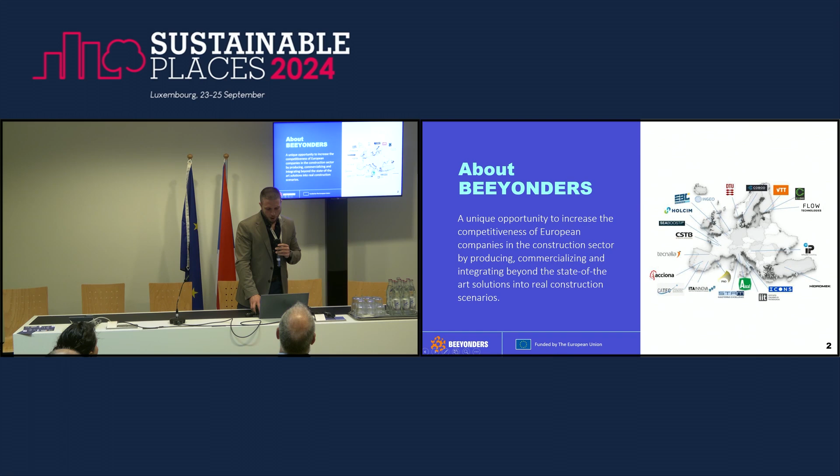This brings an opportunity for the construction sector to become more sustainable and competitive, taking advantage of state-of-the-art solutions that we are bringing from TRL4 to TRL6, as we just presented. If you're interested in learning more about the consortium, I'll be pleased to share more details on who is who and who is doing what.

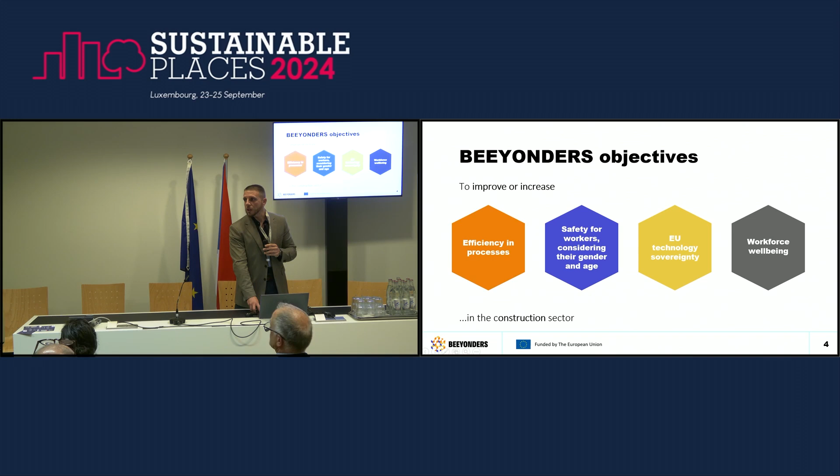Focusing on the project, the objectives we entail cover aspects like efficiency, safety, well-being, but especially the sovereignty of EU technology in the construction sector. It's also important to mention that we are engaging in cooperation with Japan so we can learn from their progress in digitalization of the construction sector. This is ongoing, and one of the use cases of the project is actively contributing to this cooperation, which is challenging yet very much of interest for us.

The 6 technologies being further developed within BEEYONDERS, deployed across our different study cases, are autonomous teleoperated ground and aerial vehicles, additive manufacturing, wearables and devices, exoskeletons, digital twins—one of the main elements we're speaking about today—and human-robot collaboration. I'll briefly introduce the different study cases of BEEYONDERS.

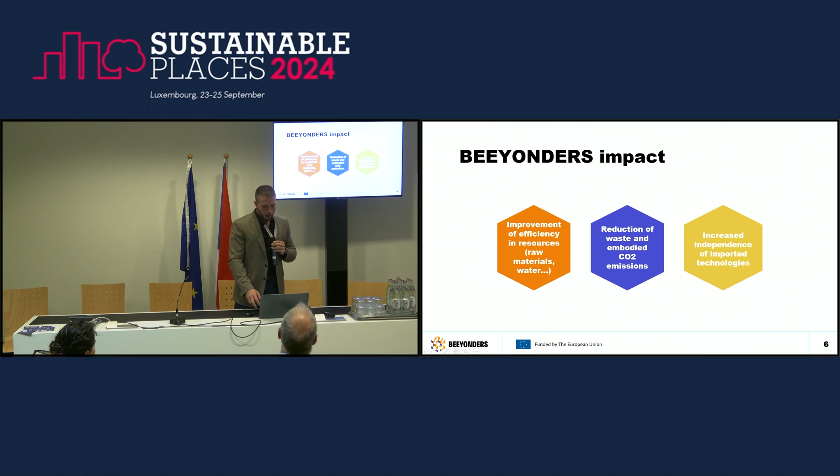These solutions are distributed across 6 real-life scenarios in order to test them. The impacts we expect to achieve are improving efficiency in resources, reducing waste and CO2 emissions, and increasing independence from imported technologies. These are a few indicators of what we are looking for.

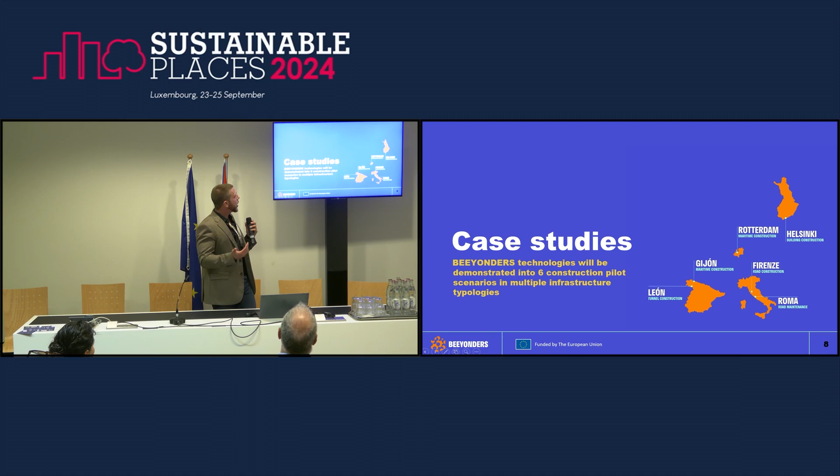Something that may be relevant for you is to acknowledge what are the pilot sites, the case studies that we have across Europe, and how technologies are distributed across all of them.

The first of our case studies takes place in León, Spain, where we are testing autonomous teleoperated vehicles in order to understand how we can maximize productivity in construction sites while not affecting construction safety and working conditions. We are also working with autonomous vehicles and digital twins for road construction in Italy.

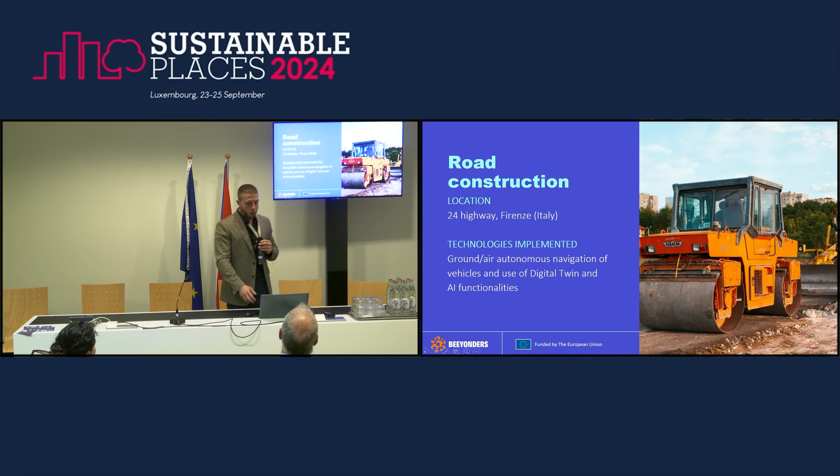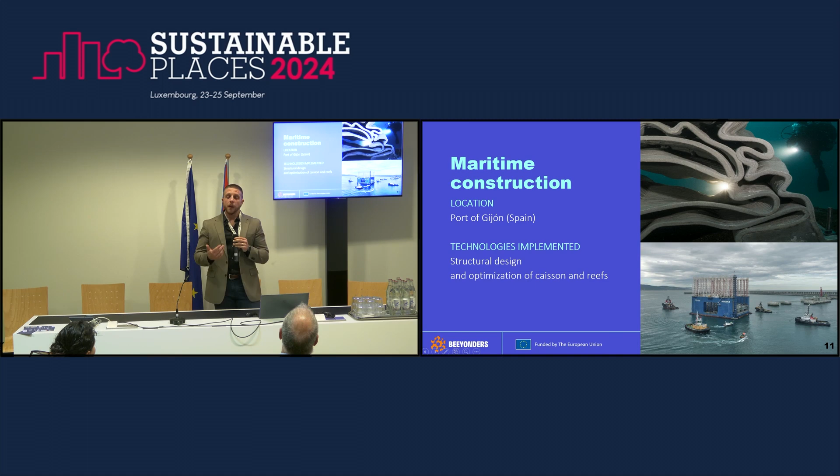We have a very interesting large-scale case in maritime construction where we are exploring novel ways to optimize the additive manufacturing of caissons and reefs that at the same time contribute to biodiversity in these maritime environments.

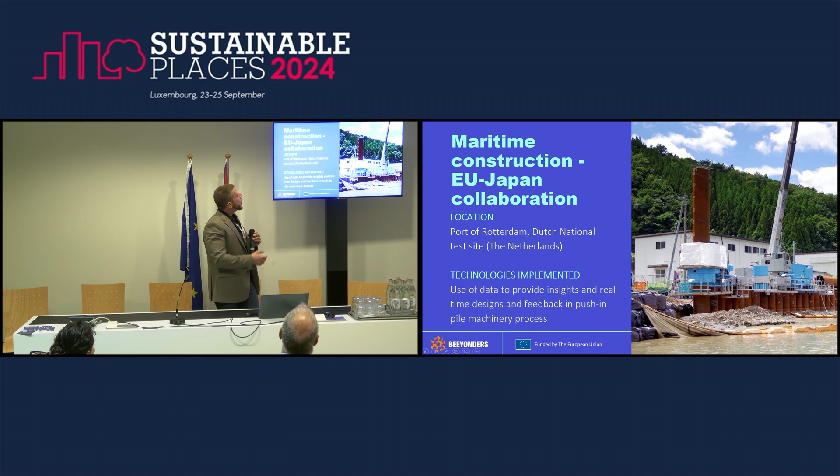As mentioned before, our case in the Port of Rotterdam embraces the collaboration with Japan in order to explore the efficiency of pile machinery processes.

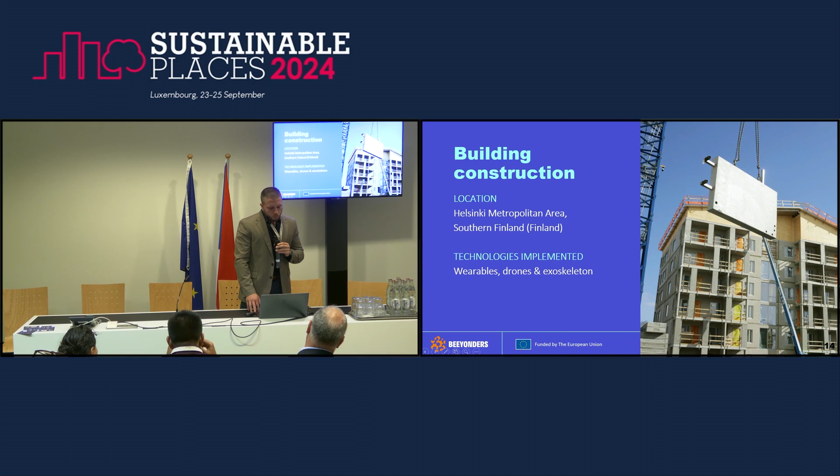The fourth one will work on autonomous robotics for road maintenance, and the sixth one will support the workers' well-being in the built environment.

The main reason for my personal interest being here today was to present where we are—around the second half, right in the middle of the second half of the project. So for me, leading exploitation activities, it was very interesting to present what we are doing as part of those activities, because we have one particular challenge.

This is a single entry point for the digital construction ecosystem, and I'm presenting what we envision as this single window for digitalization of the construction system, inviting all of you to provide your ideas and participate in a discussion for creating such an environment. In any case, this is a comprehensive pathway.

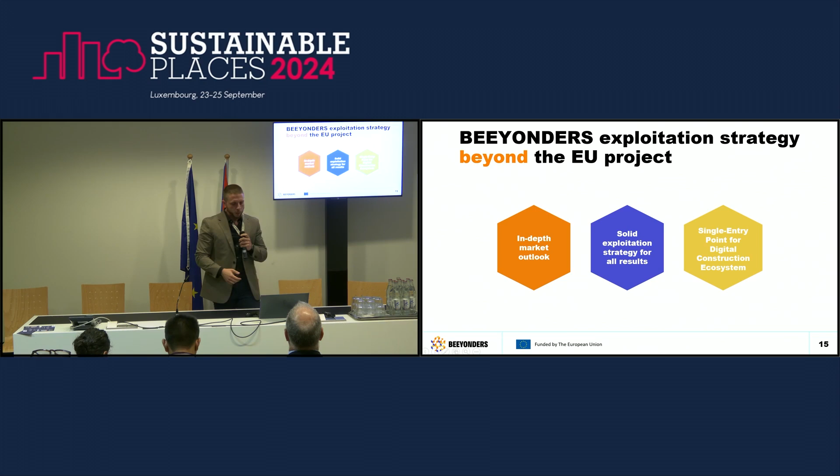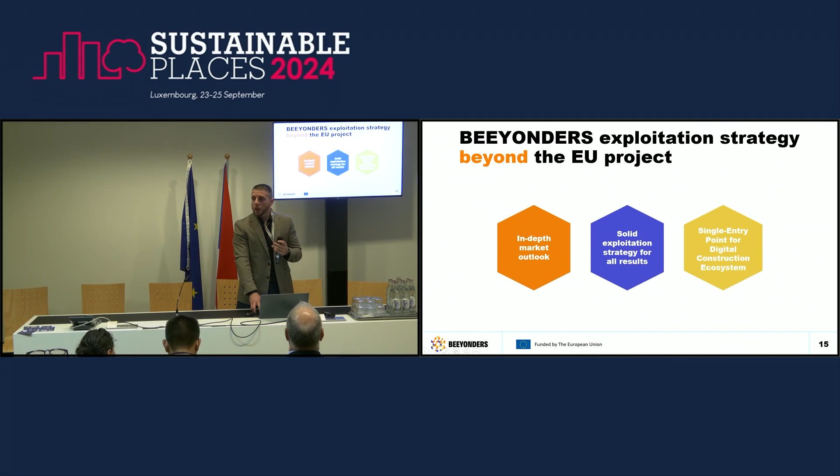We develop a market analysis and are developing conventional exploitation strategies for the results, but this single entry point for digital construction is something we cannot develop on our own as a project. So we are bringing this idea here today in order to collaborate, work together, and join forces to develop something like this.

Of course, we want to avoid creating a standalone environment, but as a project we have the commitment to define and imagine how this single window for digital construction will look like. This single window would become a hub for all actors in the value chain of the construction ecosystem, acknowledging the possibilities, the different services available, and the different elements that can help them be digital and sustainable, ultimately contributing to the overall sustainability of the construction sector.

That includes all the elements being developed within the BEEYONDERS project, but also results from sister projects and other related projects. I'm including some of the elements we are considering right now. We imagine this single entry point for digital construction as a catalog of products, services, and different elements that contribute to the digitalization of the construction sector, not restricted to BEEYONDERS, but open to other projects interested in contributing to this initiative and collaborative environment.

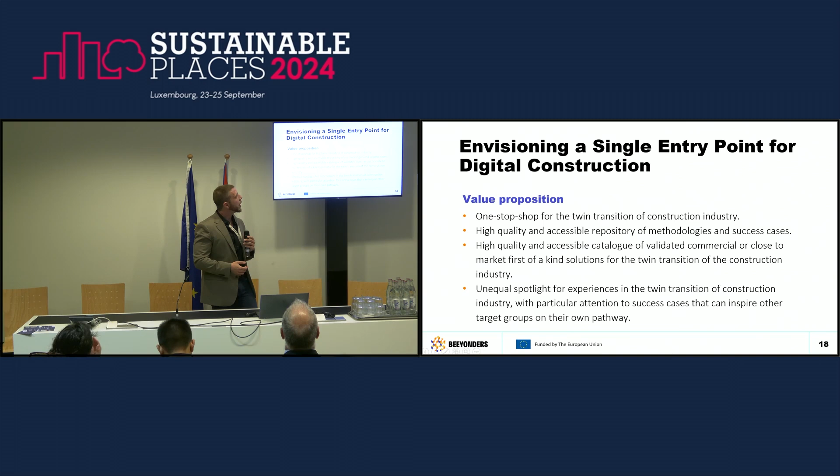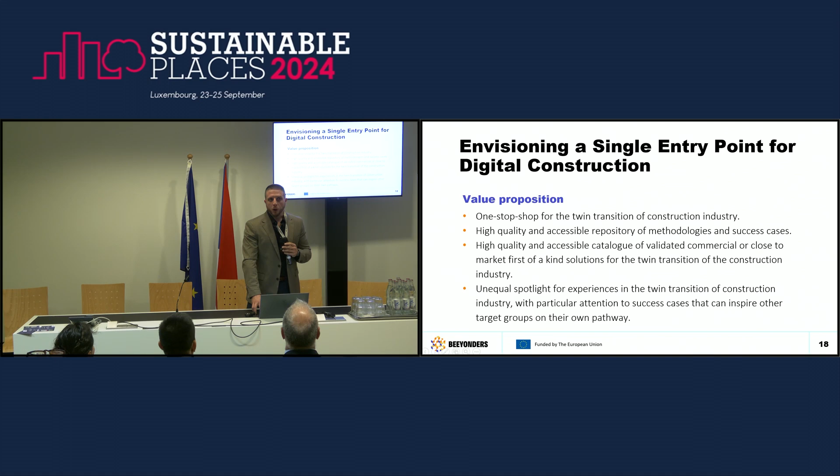We have defined, together with our partners, what would be the value proposition of an environment like the one we are envisioning. As you can see here, there are a lot of possibilities that stakeholders would be able to perceive in order to adopt or be attracted to, being interested in something like this.

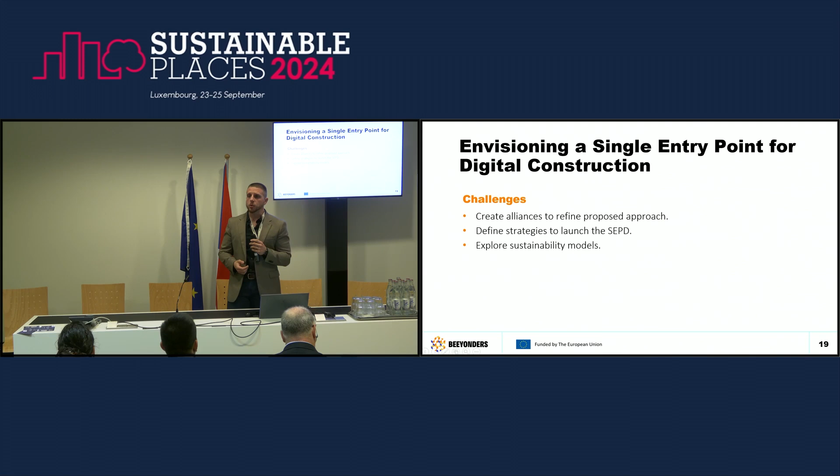Wrapping up, what are the challenges we have for imagining something like this as a project? Of course, we need alliances — this is why we are here, presenting this concept together with the other projects and everyone attending. Once we establish relationships that help create this contact point for digital construction, we can define strategies and sustainability models. We have our own ideas, but we'd like this process to be collaborative, open to other projects, initiatives, and networks interested in participating, and we'll be very interested in overcoming the challenges together.

And that's it about BEEYONDERS.

I'll be happy to respond to any questions or comments about the project. There are some colleagues here from the consortium, so if there are technical questions, I hope they can help me answer them. But if you have any question about the project, feel free to reach out. I think questions will be handled later in the panel discussion, so keep them in mind for later. Great, thanks a lot.

Coming up next is Jason Rambach from the German Research Center for Artificial Intelligence, representing HumanTech.

Yeah, so we have to set up the presentation. So yes, please think about those questions, and later in the panel discussion we will have a lot of time, so don't worry. I think we have to download them. Yeah, up there maybe. Okay, so it's refusing to download. Okay, there. Okay, two times.

Okay, so thanks a lot. Thank you for the introduction, and I'm happy to be here today to present the project HumanTech. I'm Jason Rambach from DFKI in Germany, in Kaiserslautern.

So why are we doing HumanTech anyway? Our mission is pretty much similar to the other projects of the same call, our sister projects. We want to increase the safety and well-being of the construction workforce, improve productivity, and move towards becoming greener, making more efficient use of resources.

So how do we address this? We do that in different ways in the project. Here you can see some results — the project is already quite advanced, headed towards the end of it in May 2025. So we already have some results.

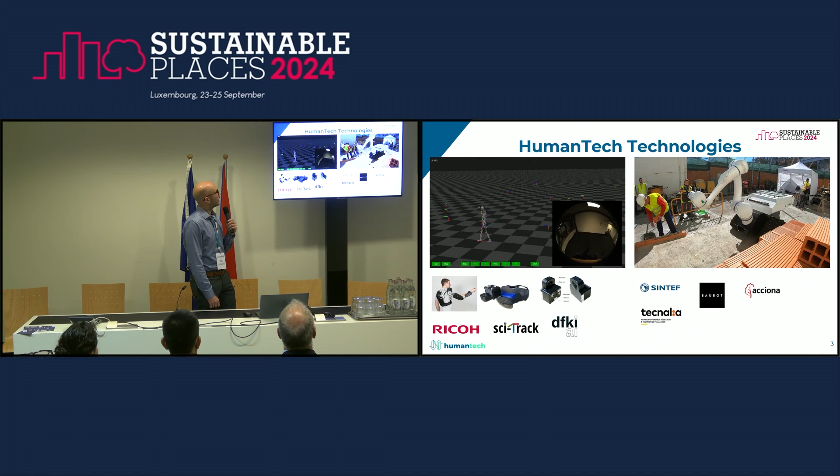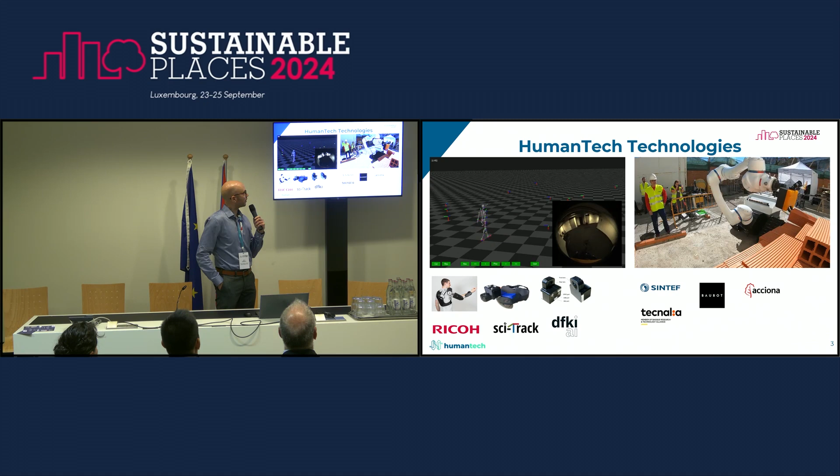Here are some examples. On the left, our work on wearables that can be used to support construction workers by localizing them and also tracking the position of their body pose. On the right, our work on a support robot for construction workers, an example of supporting in building a wall by grasping bricks and handing them over.

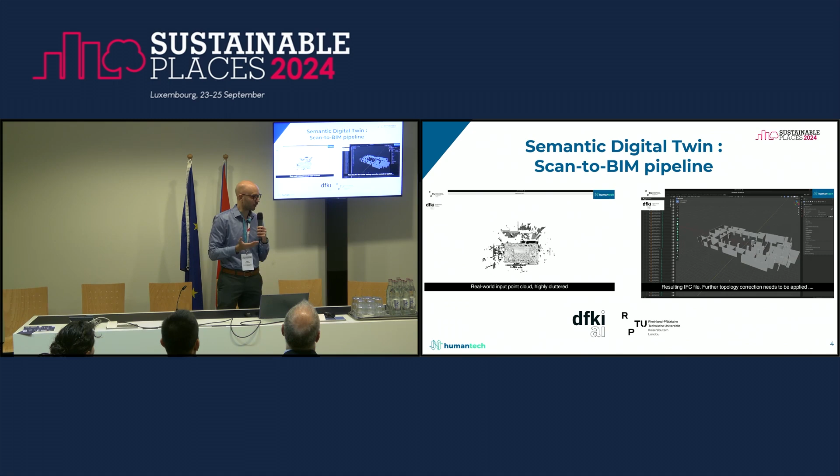But for today, the selected topic I want to talk about more is our scan-to-BIM pipeline. So what is scan-to-BIM? It's going from what is seen on the left to what you see on the right. On the left, you have what you get from a scan — an unordered 3D point cloud that doesn't give that much information. On the right is the BIM file, an IFC format file that is more structured and contains more information. You can expand it to contain information on material, and it can be integrated into any BIM-based construction process.

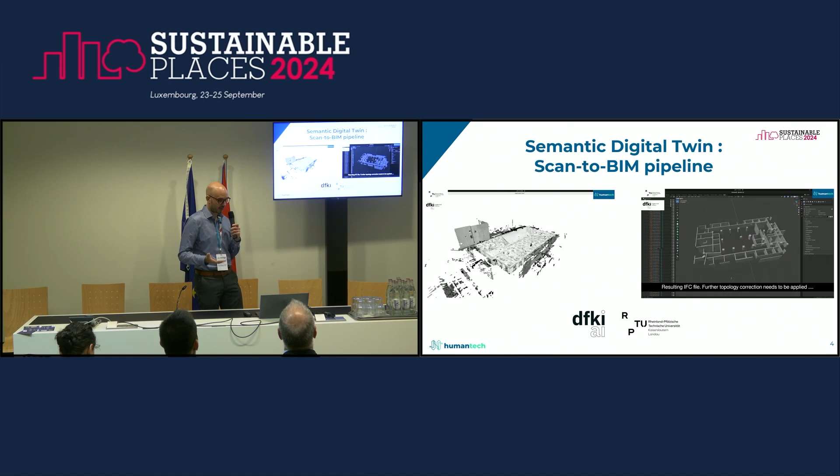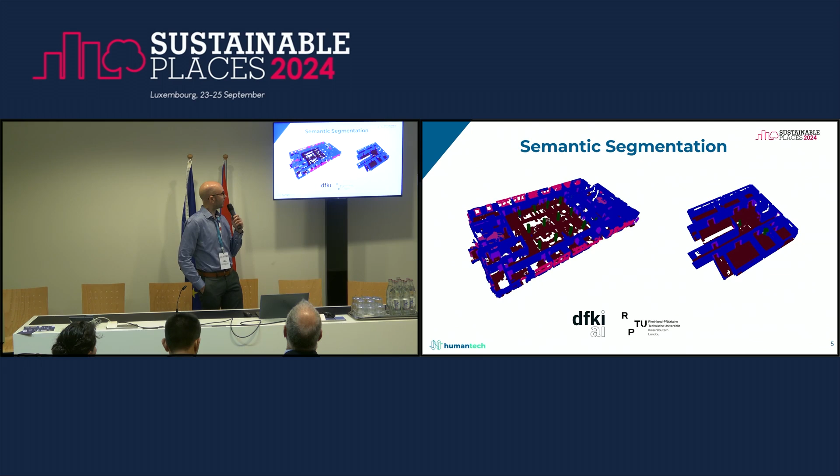So this pipeline consists of several steps. One of the most important ones, the first step, is semantic segmentation. Here we use an AI model for that. The challenge is the absence of enough data to train such a model — there is point cloud data, but not really a lot from construction sites, so that's something we are trying to overcome.

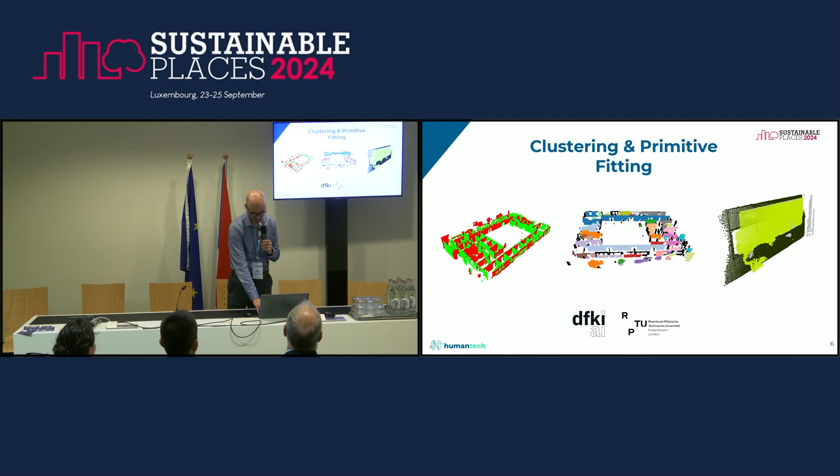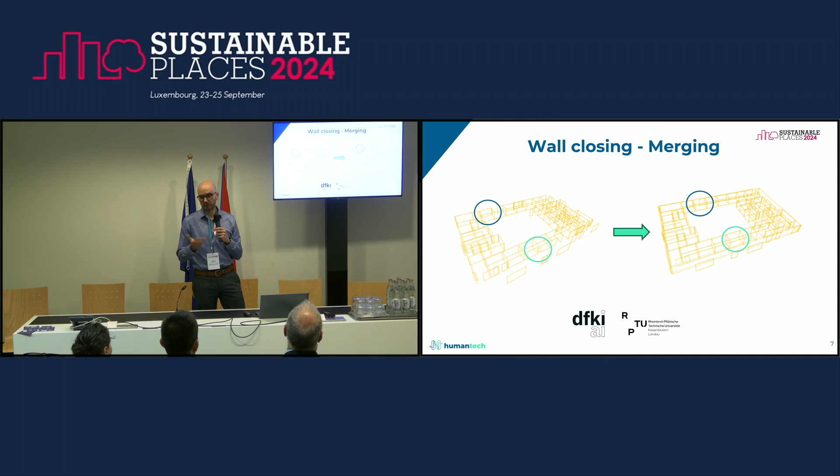After doing the semantic segmentation, there are several other steps, like clustering this point cloud and fitting some primitives to the points. In the end, there are some final steps that need to be done: closing walls and merging some walls that are not continuous because of defects of the original scan.

Where are we today with the pipeline? We have participated for 2 years in the CV4AC Scan-to-BIM challenge at the CVPR conference, and we have been at 3rd place 2 times. We are constantly improving our AI segmentation model.

What we need for that is basically data, as I said. So we also try to look into other techniques like self-supervision and so on, to work with less data.

We are trying to support more object classes. Right now we have the basic classes, things like windows, walls, floor, doors, and so on. But we want to extend to more functionalities, more classes.

Finally, we are currently exploring different use cases for the scan to BIM. That is something we are always happy to hear input from other experts on.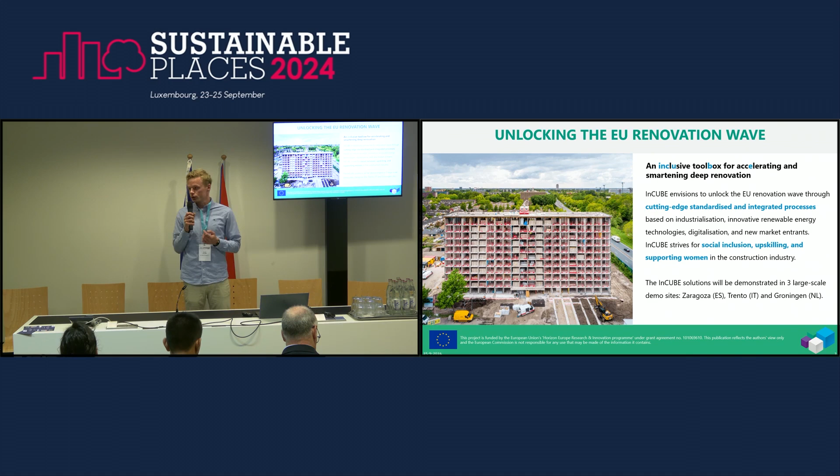The project itself goes from 2022 to 2026, so 4 years. We're halfway through, and halfway through is also a moment in which we can show some innovations we have already tested and some progress we have already made. So I'll show some examples of this.

The problem itself we encountered, and also this happens at Van Wijnen, we got to be honest: low rates of productivity, poor or no integration of solutions. It's a very conservative sector. Also the limited use of building information—there's a lot of data to be gathered in the process of building the building, but also in the operation phase, but this information is simply not used. And it's highly complex and project oriented, so information gathered in one project is not used in another project.

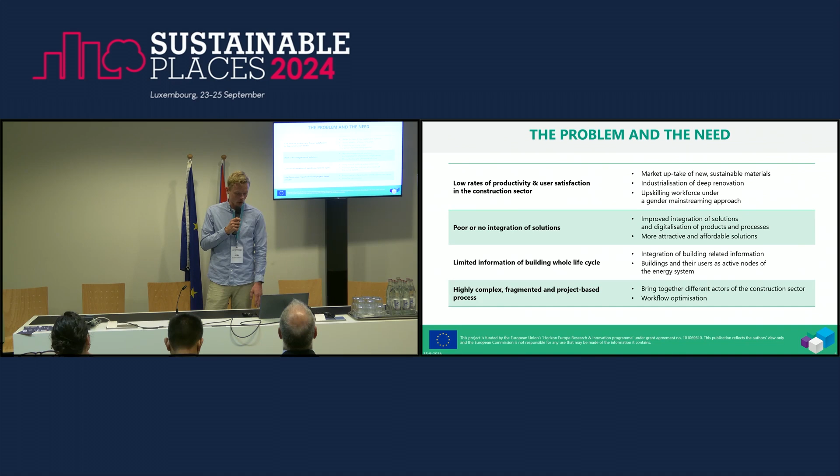So we aim to tackle all of these aspects by developing innovations to counter these problems, and we aim to do that by gathering information, using digitalization, industrialization, and all keeping in mind the sustainable development goals.

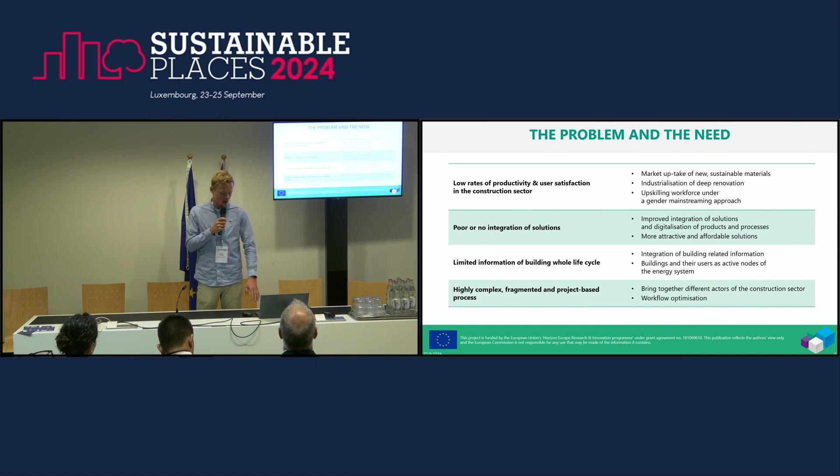For the key expected outcomes, we drastically want to reduce waste, and especially the top 3 are very close to our hearts at Van Wijnen: we want to reduce waste, renovation costs itself, and working time with hazardous activities, so improve worker safety. And then in the operation phase, we want, of course, the new demo sites to increase the energy savings, create renewable energy communities, and reduce the exhaust of greenhouse gases.

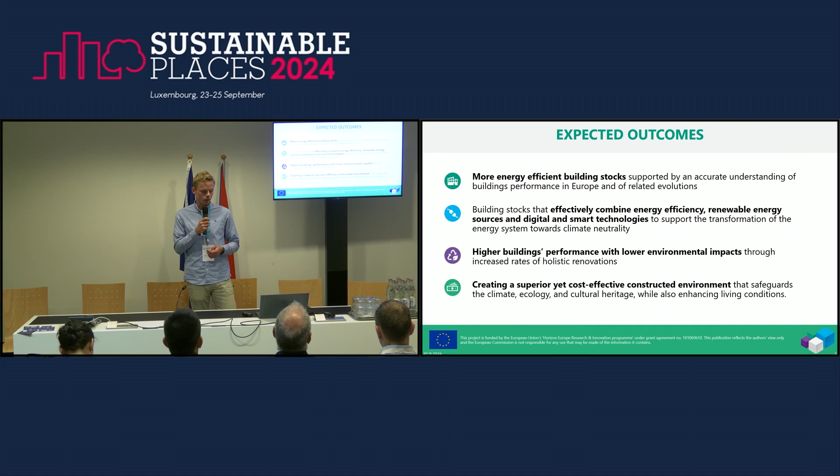We want to do so by making buildings more energy efficient, using renewable energy sources, and using smart and digital technologies, so that in turn it can have a higher building performance. And we want to do this in a cost-effective manner.

We have 4 pillars of innovation: industrialization of building aspects, digitalization and new market technologies, new technologies and materials, and new market entrants.

And these four all culminate into one digital InCUBE suite, which is a software that helps gather all this information from these four innovation pillars and provides you information for decision making in the process of your construction project.

Then some tangible innovations we've already done on our side. Machine-human collaboration. We first want to emphasize the robotization we are looking at. We have deployed a demolition robot, but the innovative part here is that we've established a BIM connection.

Building information modeling is the 3D environment with all the information. Everybody can collaborate, so also this demolition partner could see the BIM model itself in real time.

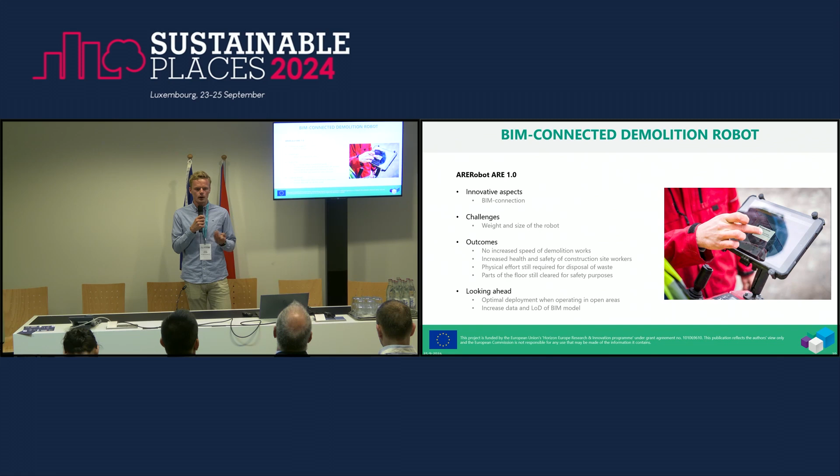Then looking ahead, the optimal deployment, it was very narrow. So the optimal deployment we saw is just in open spaces. In tight areas, it was difficult to use. And if we increase the level of detail in the BIM model, the operator said he could benefit from it more, so he knew exactly where the pipes go and where the cables are going.

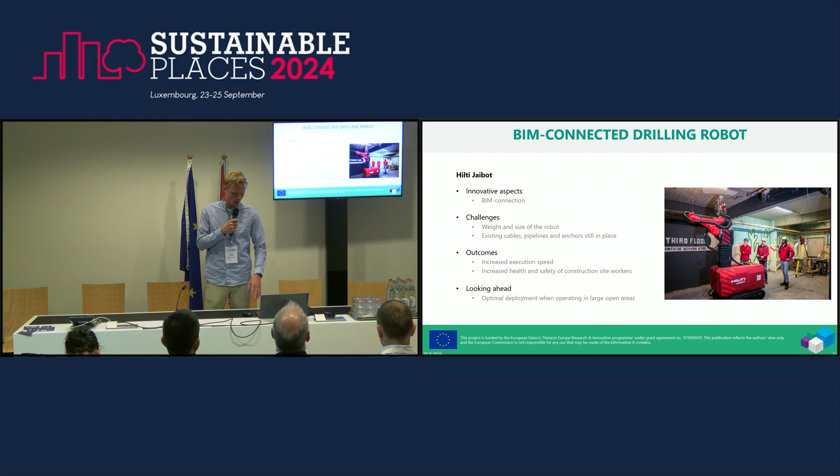Next off, we have a drilling robot. Similarly, we established a BIM connection for this as well in collaboration with Hilti. We have prepared everything in BIM, and then we send all the data to the robot, and this robot basically conducted all the drilling and anchoring in the building autonomously.

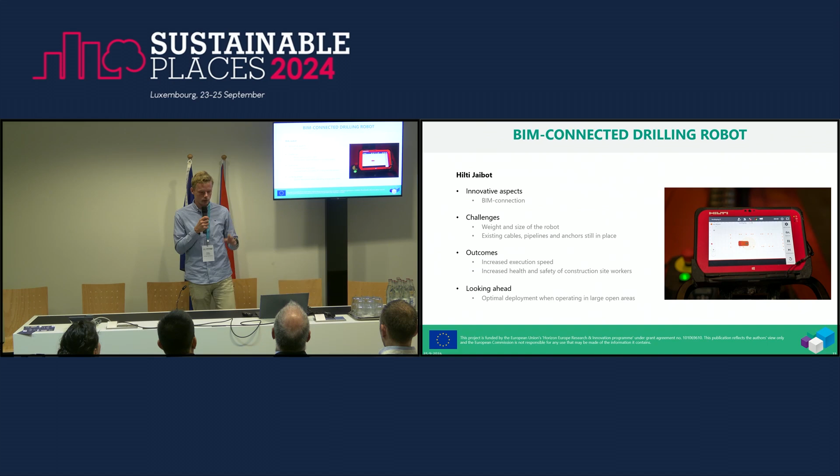This worked very well. The outcome was an increased execution speed and an increased health and safety for the workers, because there were no drilling holes above your head anymore. So it was much safer.

We also tap into Scan to BIM on our project. It's interesting to see earlier projects doing this as well. We have done this in the Netherlands and in the Spanish demo site as well.

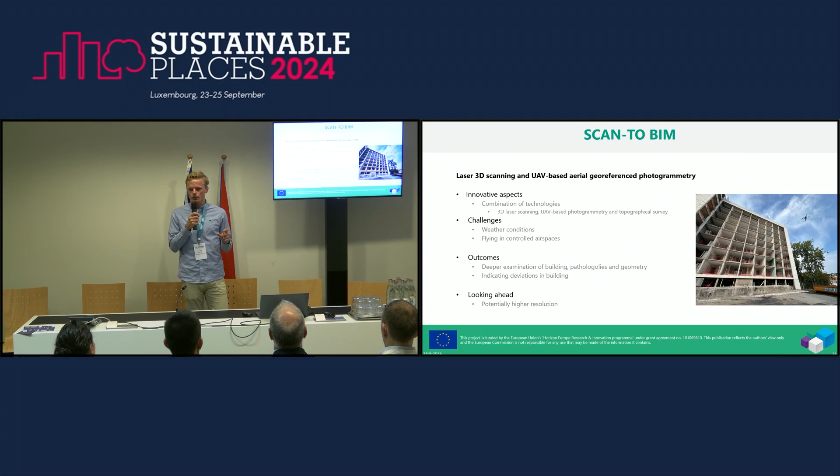But when we took off the facade, we scanned it all in with a UAV, with a drone and a photogrammetry scanner. This drone gave us very good insights into the actual deviations in the building, because the building itself has some blueprints, but that was from the 1960s, so these were quite off, we found.

And we made a point cloud out of this, and this point cloud gave us an indication of where the deviations were, and we handed these to the work preparation side of our company, and we found some deviations which actually helped in developing this renovation, and the steel structure, for example.

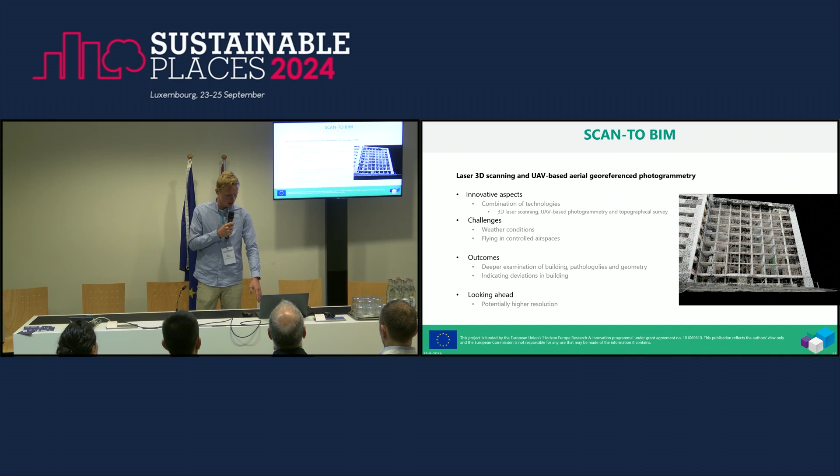Looking ahead, it would be highly beneficial if there's even more detailed point cloud, we would say, because this would only give us an indication, but it was not enough for actual production.

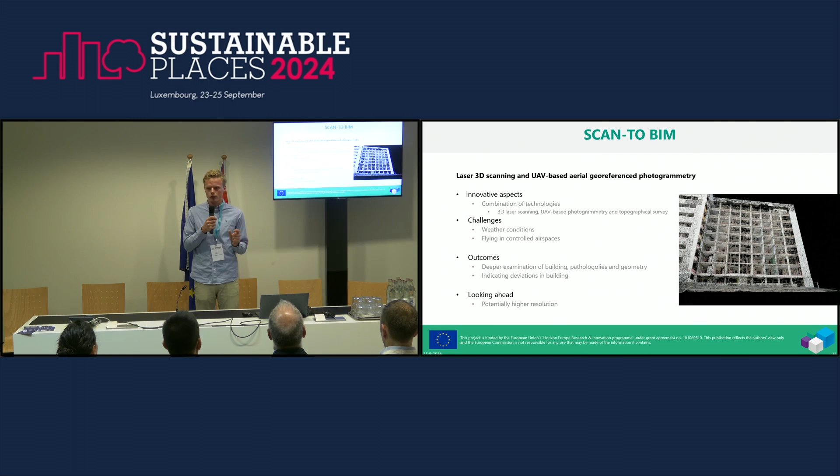Then on the Italian demo site, RINA develops the resilience dashboard. Resilience dashboard takes into account all dynamic aspects on the construction site, such as worker safety, environmental monitoring, site logistics, and waste management, using sensors and models.

This is all being put into one dashboard, which could be used for, I think, for example, in a construction company, when having the demo site or just any construction project. If you measure the worker management and the environmental waste management, you have a dynamic view of this demo site, and this could be also presented in actual dashboards, which helps you in making decisions.

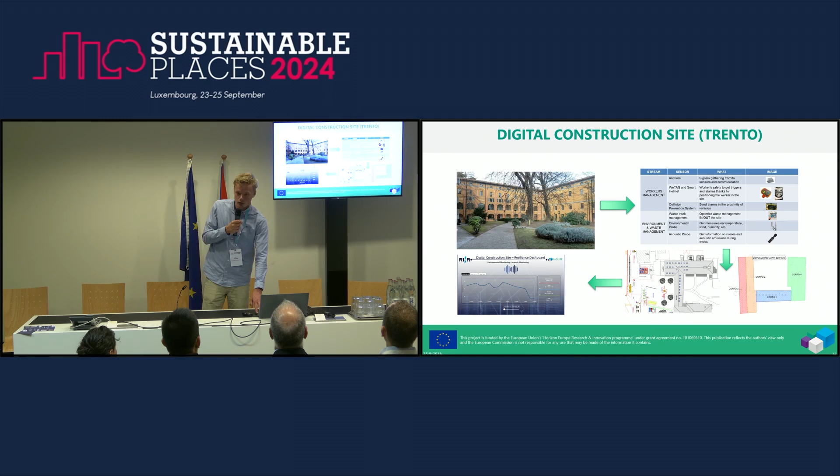So here you have, for example, the use of the PPE, personal protective equipment for workers, using sensors. Here the noise levels on the construction site, and here it's a decision tool for either selective or non-selective demolition. RINA is also here present, so questions could be asked to them later.

Then our last part is streamlining innovative materials. As said, we want to use sustainable and new materials as well. And we do this by collaborating with the Dutch partner using prefabrication, Dutch partner Webo.

As explained, we take off the facade. This is the BIM model of it after the facade has been taken off. And then, to avoid scaffolding, because scaffolding on a 10-story building is quite dangerous, we want to apply facade elements prefab on site. These elements are expanding the available space through the steel structure, and it has integrated PV panels.

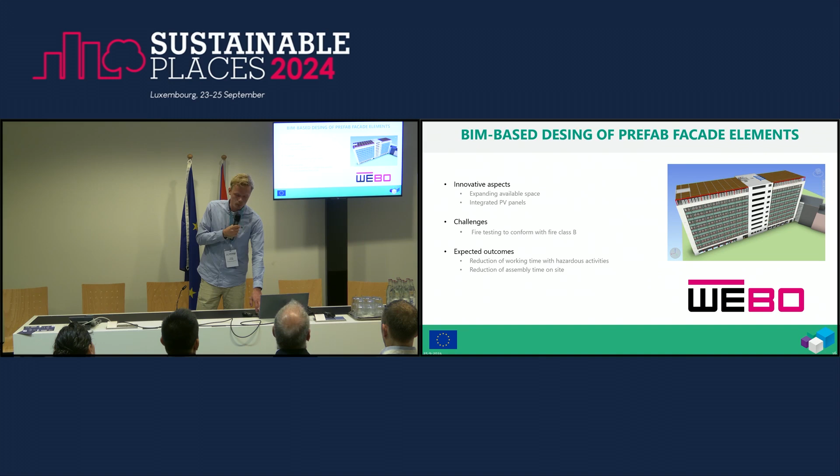So we optimally use the facade surface. How it goes in practice is that we have taken off the facade, steel structure is being built around it, new floors are being put in, the facade elements are just attached like Legos, basically being all pre-produced in a plant earlier. It's a timber frame facade element, and it's all done through BIM on the outside, and then on the inside this is how it looks and how it connects to the steel structure.

It was difficult because it was a timber frame facade element using bio-based insulation materials, so fire testing is always difficult to obtain.

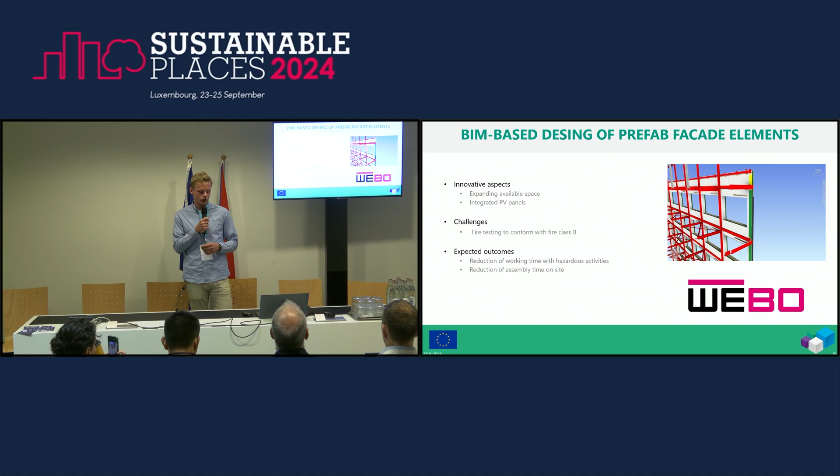And the expected outcomes, they are being put on in 2 months. So the expected outcomes here are a reduction of working time, because it just, like I said, attached as Legos, and the reduction of working time with hazardous activities because no scaffolding is needed anymore.

Similar facade elements are being developed in the Spanish demo site as well. So we are eager to see what happens over there as well. This was just a small insight in everything we did from a pragmatic standpoint. And this is all the partners that are involved. Thank you very much.

Reincarnate. It maybe sounds a bit mystical, a bit philosophical. To be honest, that's what we do always on the end of the GA during the dinner and the drinks after it. But now I'm going to present some figures and facts for you. And let me start by introducing the project for those who do not know it yet. This is, by the way, not intended as a comprehensive presentation, but please consider it like something like a trailer or a teaser that you see on Netflix. Just give you a brief overview, and I'll invite you, if you're interested, either to talk to me or my colleagues, or go to the beautiful website that we have.

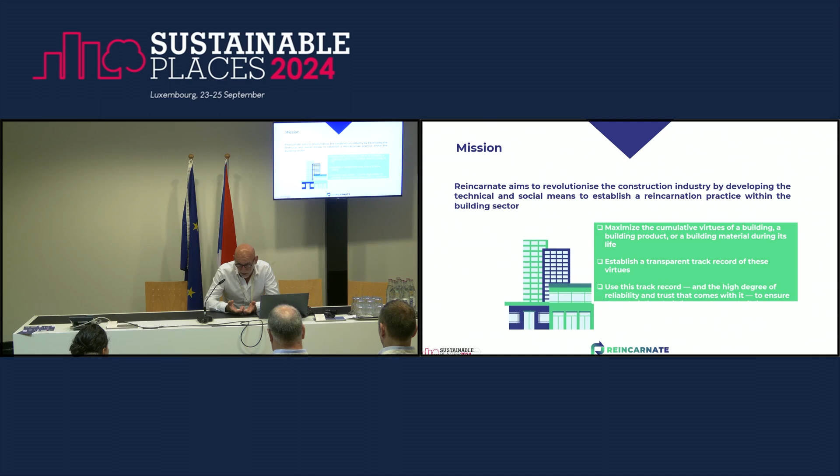Because this project, our mission is - there are some similarities with the presentation that we have seen before this morning, but in a sense it's different because this fully aims at circular economy. So really not only recycling, but if you are able to extend a lifetime, then you really do not have to recycle. So that is the first profit that you can have. So it is actually based on three pillars, you could say: either reusing it, extending lifetime, and then, if not possible, recycle. And that's the entire philosophy of Reincarnate.

Who is Reincarnate? We're all together with 16 partners. I won't show them all, but one in particular, TU Berlin - for those who do know him, Timo Hartmann, professor, is coordinating together with us, with myself and the team from DEMO. We are the technical coordinator. Next to us, we really have a great selection, I would say, of different companies, like, of course, the research institutes, but also some companies specialized in real estate, architect, construction. Not the least important, a company from Sweden, completely specialized in waste management, and here ourselves with some other companies specialized in IT.

So what are we aiming? What are the objectives? Again, mainly three pillars. What we try to do is, and here it is placed in the middle, the limited average lifespan. It has been researched that the average lifespan is only 39 years, and however our German partner said it's even less, 25 to 30 in Germany. So that's quite simple, you could say - if we could extend that, then we've already solved a lot of things. But also, if we are going to construct or demolish something, there's a lot of waste, and it is the largest waste stream in the European Union. So there's also an ambition to reduce that. And if there's such a large stream, that wouldn't be that bad if you could reuse it, but that's not the case either.

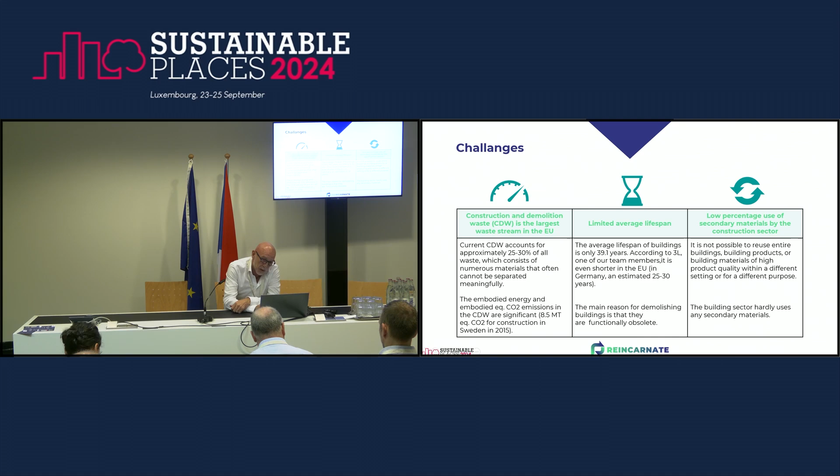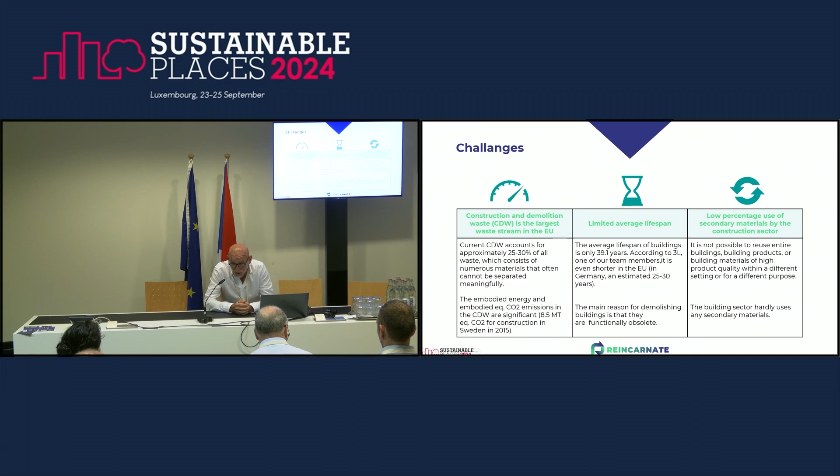So there's a lot of factors that are causing a lot of problems, a lot of waste, a lot of unused potential, because one of the partners said as well, waste is material that you can use, but without information. And if you take that approach, all of a sudden you see a lot of potential in it.

So what is our approach in Reincarnate? We have 10 innovations, and I will show very briefly some of them to you. And we have 11 demonstrators, demonstration cases where we are really applying those innovations, and everything is facilitated by this one CPIM, shown here as well. That is the Circular Potential Information Model or Management System. It is too small to read, but like I said, it's more intended as a teaser.

So here on the top, for example, we do see some innovations that we're using for the building inspection. And also the presenters just before me, they've showed all kinds of innovative techniques like scanning, scan to BIM, etc. Those are the techniques that we are implementing as well. So there are a couple of innovations really focused on collecting data, etc.

The innovation, the Circular Potential Information Platform, that is something where we bring everything all together. So in the core, we have the demonstration cases where all the captured data, either via scanning and exported into IFC, that is central, but there's also an IoT system where we can use all kinds of data from all the sensors that are being applied. And there are all kinds of functionalities. I'll come back to them later a bit more. So this is the overall scheme.

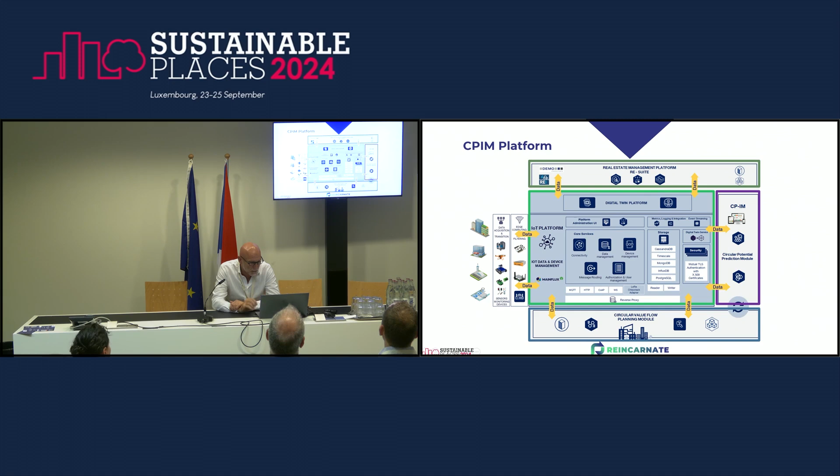And again, I don't expect you to fully understand this scheme, because I do not do myself either at this moment. One of the solutions or innovations is robotic disassembly, and it is actually used not only to save cost, but really to increase the material recovery potential of all the building components. Again, first ambition is try to reuse the building, different function, or extend the lifetime, but if not possible, take it apart and use it again.

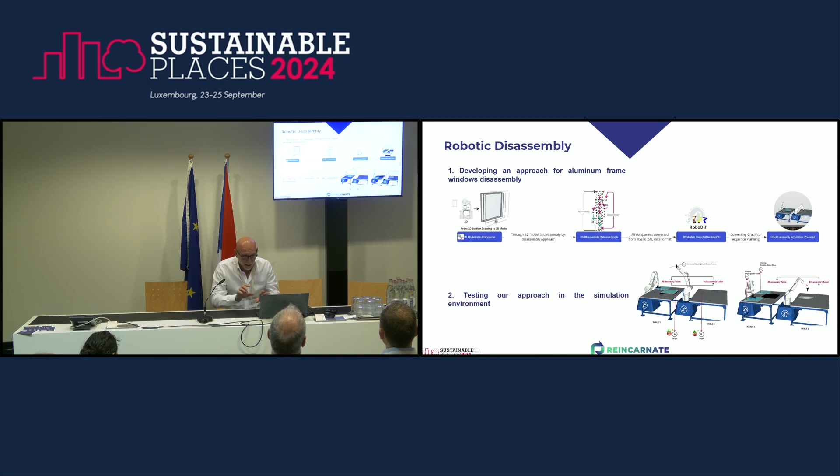So this is done by one of our partners, and of course, they have a simulation there, and there is a movie where they did do it in practice. And to be honest, I was not present, but looking at this very short clip, you can see it's a window frame. Well, I do not know whether the test was successful or it failed, but it is demolished here. So I think it's still a work in progress.

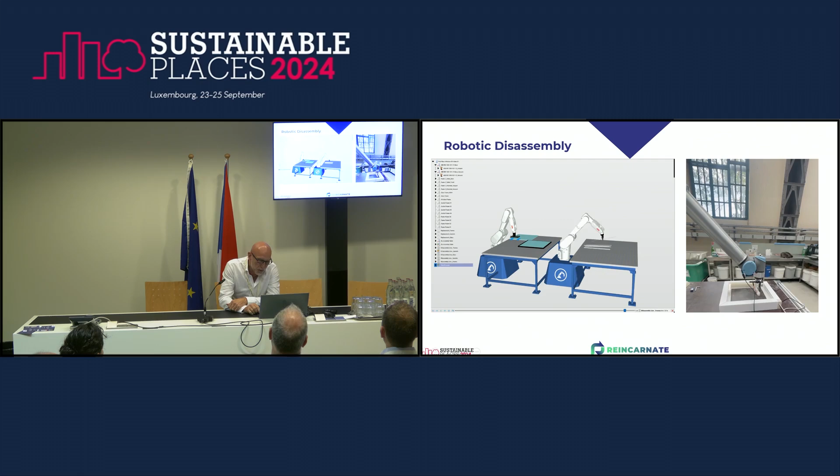But also the previous presenter showed you some stuff. So this is really something that, for me, it's not a question of will it happen, but it's more when will it happen, and well, can we use it really in full speed.

Another innovation is non-destructive testing using several devices - crack and moisture detection. This isn't innovative by itself, but combining it with the platform and risk assessment decision tools is. These devices connect to the platform for crack detection, moisture, and other criteria, helping both on-site and off-site assessment to optimize the potential of reusing elements.

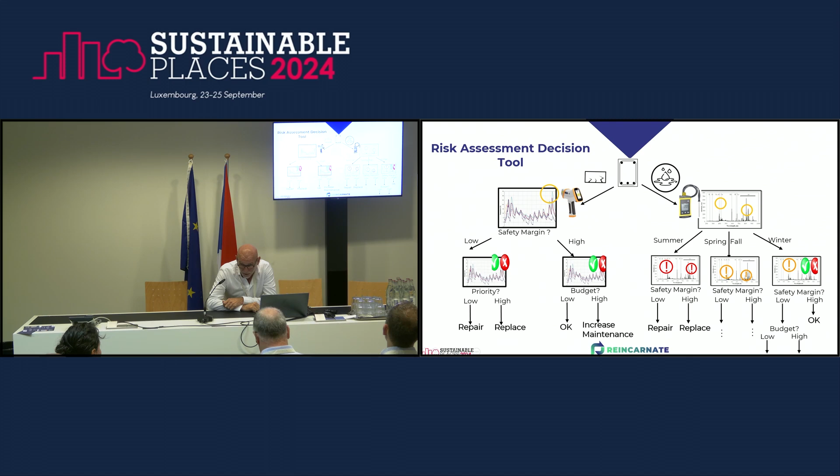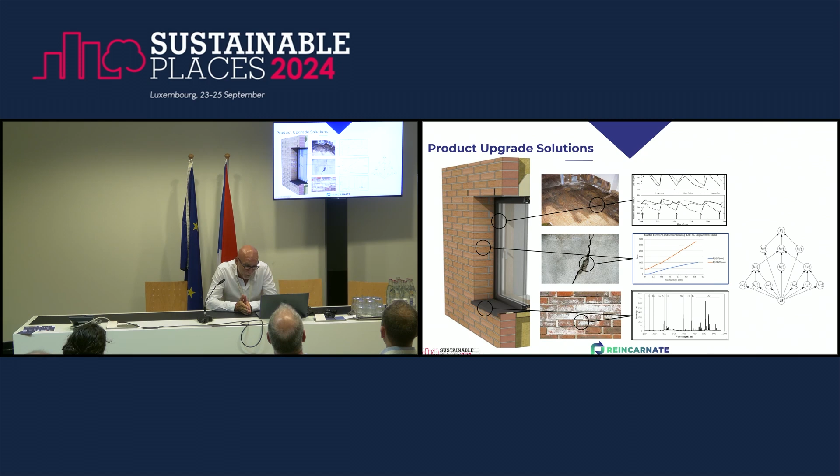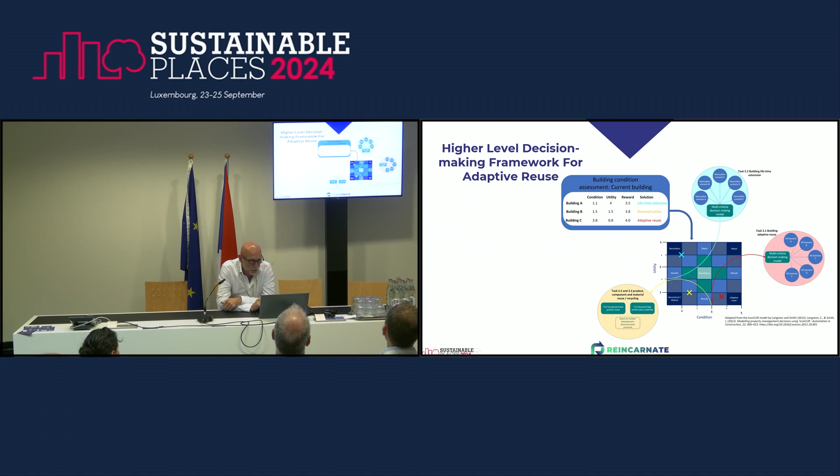What I might not have said is we're halfway through the project. In the beginning we did a lot of groundwork - setting up, researching - but now everything is going to be applied for the next 2 years. This is where, in my opinion, we can really create impact, including a higher level decision-making framework. I won't go into detail as I'm running out of time.

Lagemaat is one company, but there are more who are really interested, and we're already able during the project to incorporate their feedback. We're in discussion now about a commercial spin-off where they can facilitate their processes. Nothing is signed or defined yet, but if you're able to do things like that halfway through a project, I think we're on the right track. Check me in 2 years to see what happened for real.

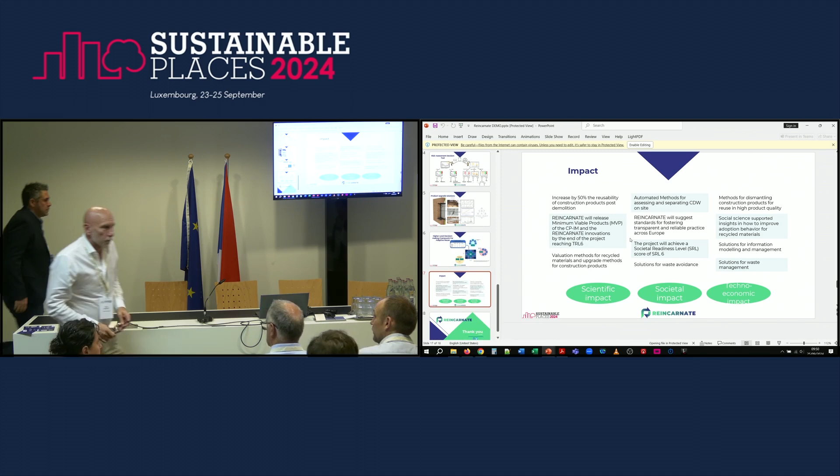Thank you. Whoops, I just closed it. Go to the PDF, to the Adobe, sorry, there's a link. Okay, and then we have the workshops. Right. 25th. It's that one, and that's us. Okay, that was easy. Download.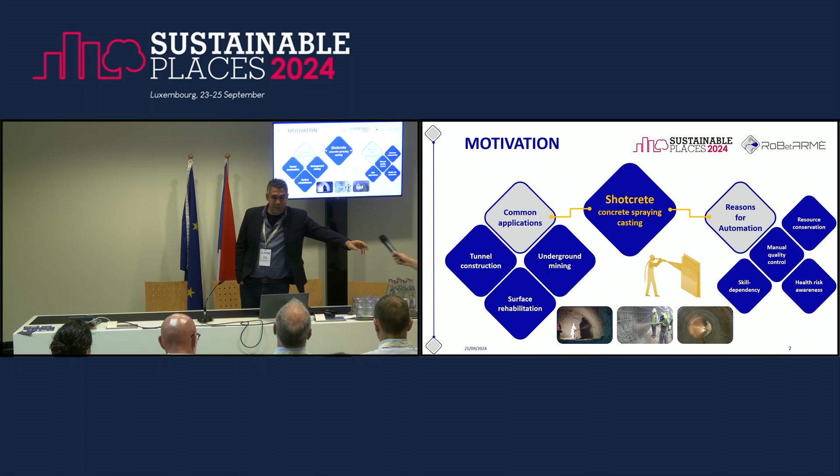Good morning. I'm Dimitrios Giakoumis, coordinator of the RoBétArmé project, and principal researcher at CERTH, one of the biggest research centers in Greece. Regarding the RoBétArmé project, I don't think it's necessary... okay, it is necessary. Thank you. Is it possible to come towards the right side? Yes, okay, it is just that.

The RoBétArmé project focuses on shotcreting specifically. We develop AI and robotic solutions for addressing the process of shotcreting in construction. Shotcreting is common in several applications, from tunnel construction, underground mining, to surface rehabilitation, and there are particular reasons to automate it.

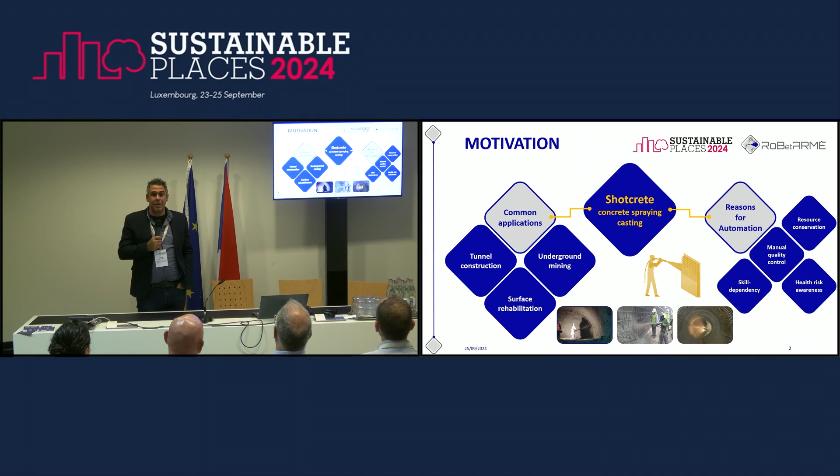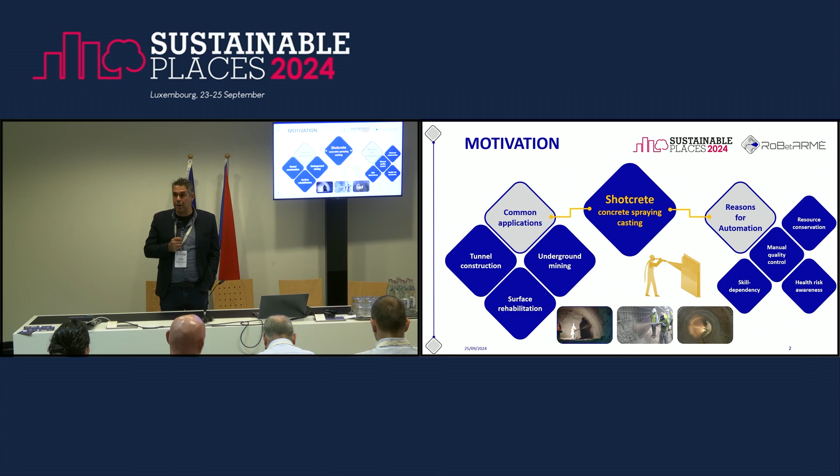For instance, first of all, for resource conservation - it's a process that is very fuzzy when done by workers, and there's a lot of margin for resource conservation there. There is manual quality control as it's currently executed, and it's highly dependent on workers' skills, with major health risk issues if safety measures aren't properly followed. What we're doing is focusing on human-robot collaboration, and through advances in perception, cognition, mobility, and additive manufacturing, we develop our solutions.

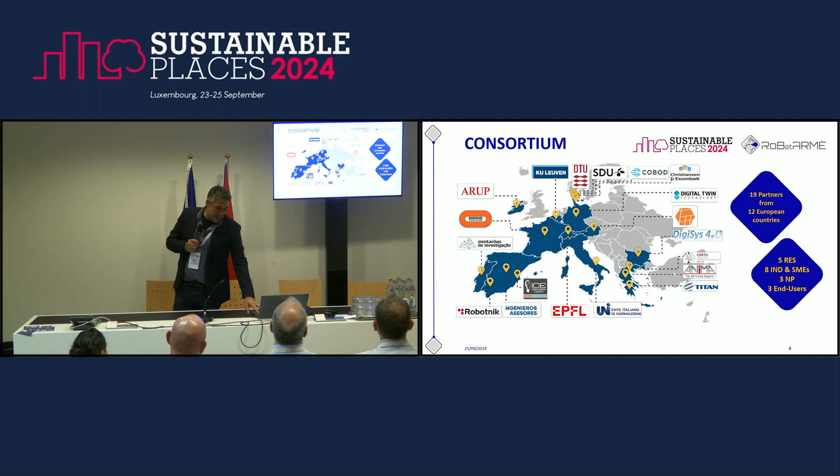We are on this journey with 19 partners from 12 European countries. In essence, the project develops 2 robots.

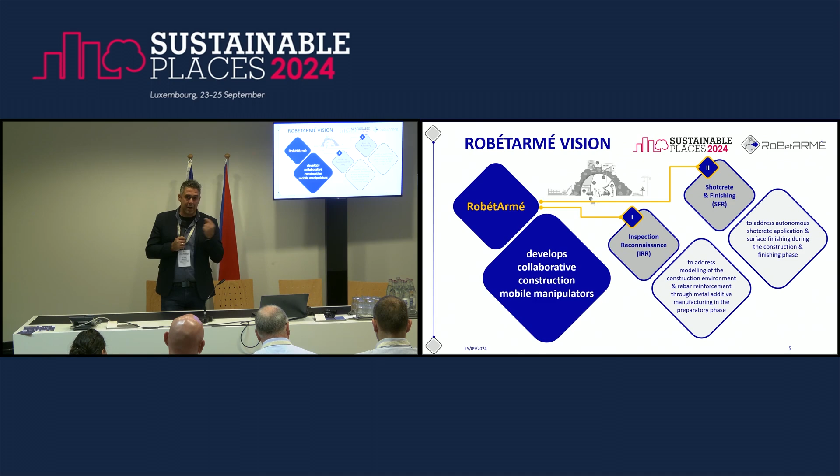We're developing two robots, but in order for these two robots to work, they need lots of AI and digital twins to operate. The first robot concerns reconstruction of the space. We develop a robot to go into a space that needs shotcreting, and it scans around the place and environment, in order for the overall system to understand the environment and how this maps to the CAD of the final outcome.

The first robot may also perform small fixes in the environment if necessary, and then the second robot, the shotcreting one, comes in to perform the shotcreting.

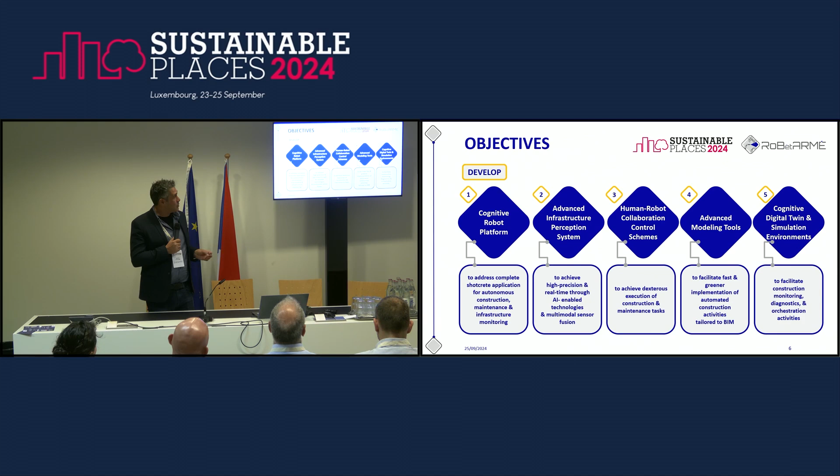To develop these two robots and all the needed technologies, we have five key objectives: cognitive robot platforms, advanced infrastructure perception systems for the robots and overall system, human-robot collaboration control schemes, advanced modeling tools, and cognitive digital twin and simulation environments.

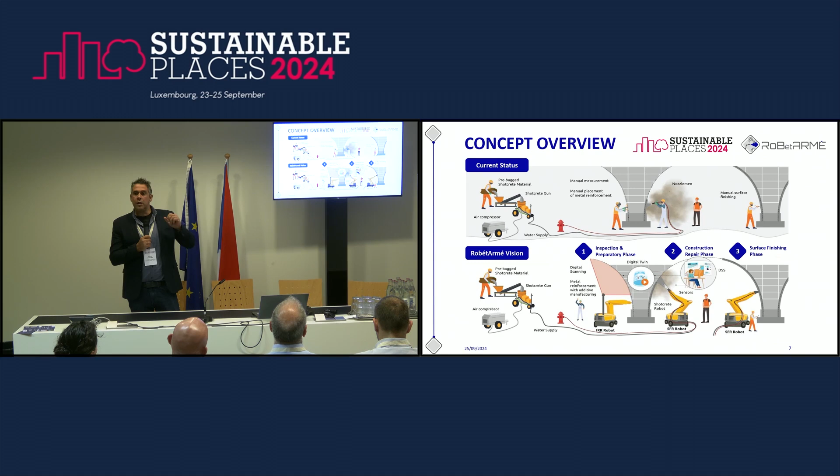Here you can see an overview of how the process is now with the workers, and how we envision this process with the two robots performing this task. The workers don't need to perform the actual shotcreting, but only need to collaborate with the robots so the robots can perform the hard part of the work.

We have four use cases: construction of ground support walls, repair of piles and beams, repair of post-station boxes, and construction of tunnels and culverts.

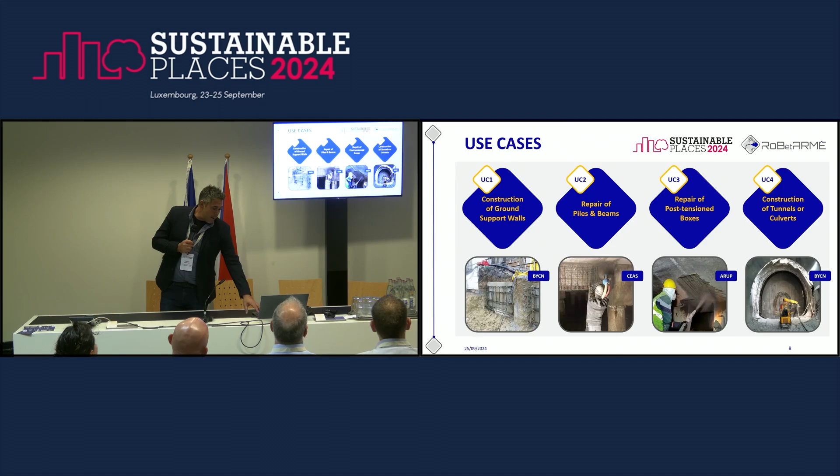At the moment, we have already developed several of the technologies of the project. First, regarding digitalization tools for construction site understanding and modeling, we have our own pipelines for scan-to-BIM. Then on top of that, at CERTH, which is a particular job we are doing there,

we have developed a tool to perform the volumetric modeling of what needs to be done so that what the robot has understood around it eventually becomes the final outcome.

So we take the CAD of the space as we actually want it to be after the job, and we compare this to the scanned outcome. In this way we take the difference in essence, and get the volumetric modeling of how much shotcrete we need to put where. This is then translated into the robot planning, and the robot can perform the overall task. This is a very important aspect of the project relating to digital twins, and it comes on top of the typical scan-to-BIM approaches.

Further to this process, one aspect I need to mention concerns human-robot collaboration, where the digital twin is also very important in our case. For instance, when the operator wants to understand better what the robot is doing, what is the state of the environment, and what is the state of the process as the robot works, the digital twin and in particular the AR tools we are developing, the augmented reality tools, help the operator understand better. It's a very nice tool for them.

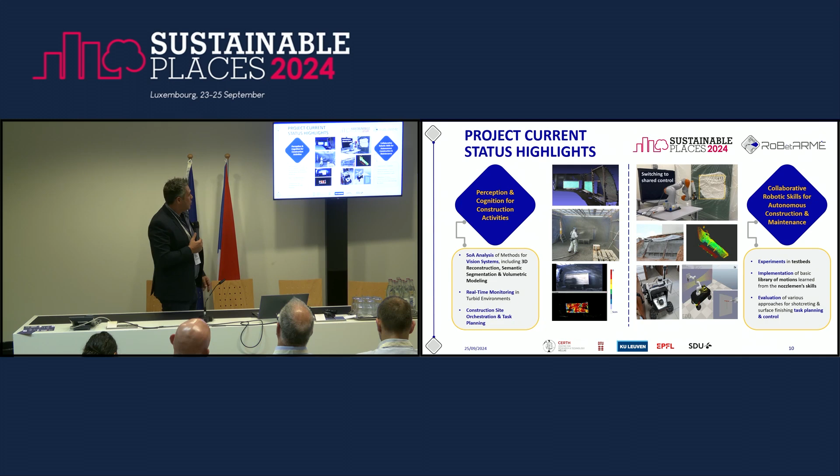Now, of course, in order for the robots to operate, they need really good algorithms in terms of perception and cognition, to understand what they are doing and how their actions are affecting the world, and then put this into a closed loop so they can refine their actions. This is something we are also doing in the project.

Finally, these are the platforms now being built. We already have the initial versions of these prototypes. At our good partners in Denmark, at CEAS, we have a test bed being developed now as the final test bed, in order to test everything across all the use cases there.

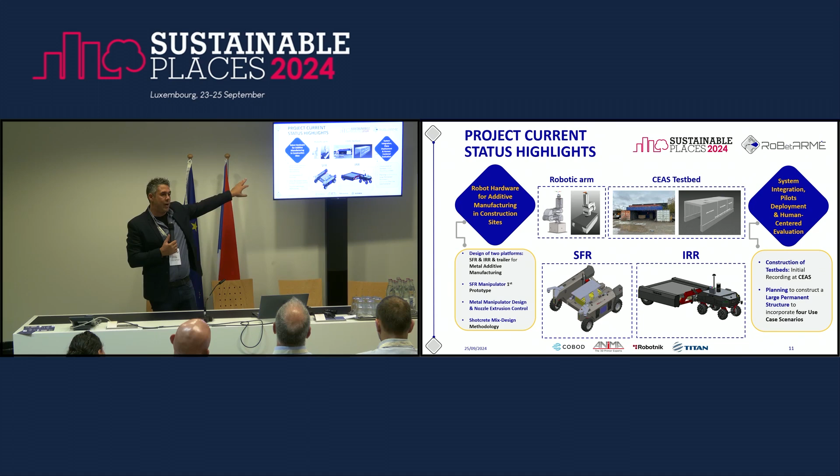These robotic platforms are now being developed. The robotic arm you see on top will be integrated together with the robot on the left, which will be the SFR robot, the shotcreting robot. It is a heavyweight robotic arm, as shotcreting entails lots of significant forces that need to be sustained.

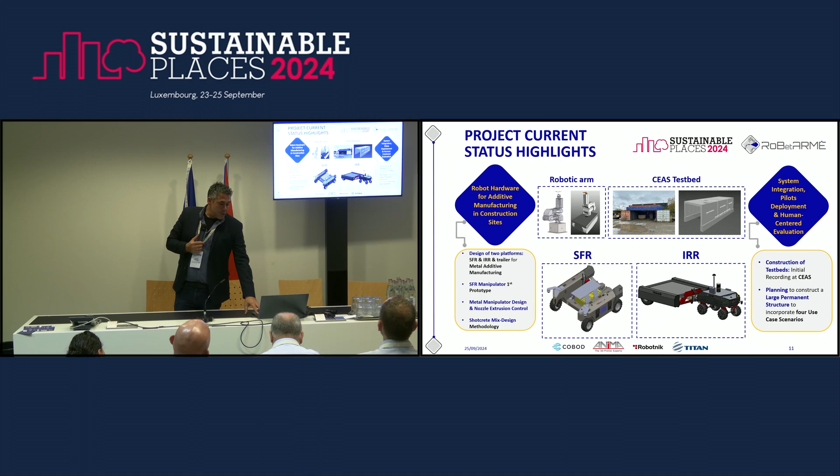So that's all from my presentation. Thank you very much, and happy to discuss later.